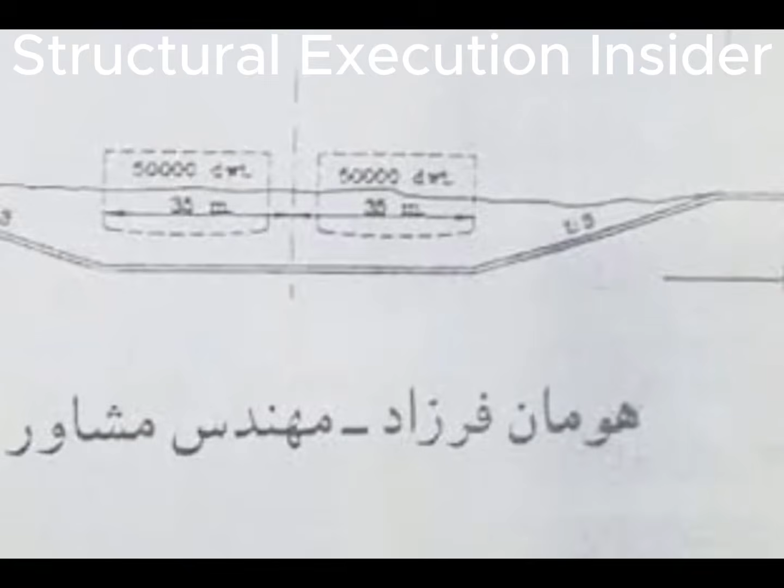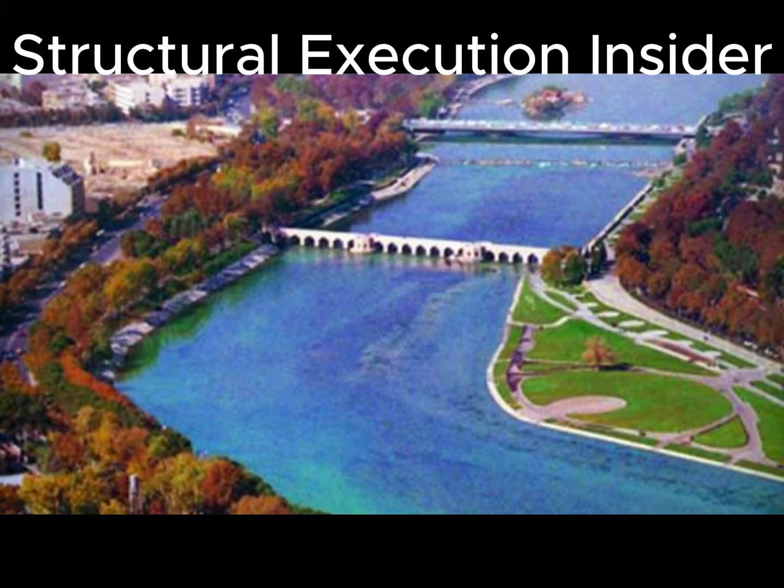For decades, Iran's water problem has been misunderstood. People talk about drought, about climate change, about consumption management, but the real problem has never been water. The real problem is the failure to understand the natural geometry of the land. Iran is a unique country, not because it has access to two seas, but because those two seas are not at the same elevation. The Persian Gulf in the south, the Caspian Sea in the north, and between them, a high, dry plateau called Central Iran.

That elevation difference is not just a number on a map. It is stored natural energy. If you understand hydraulics, you can turn that energy into water security, power generation, industrial stability, and sustainable development.

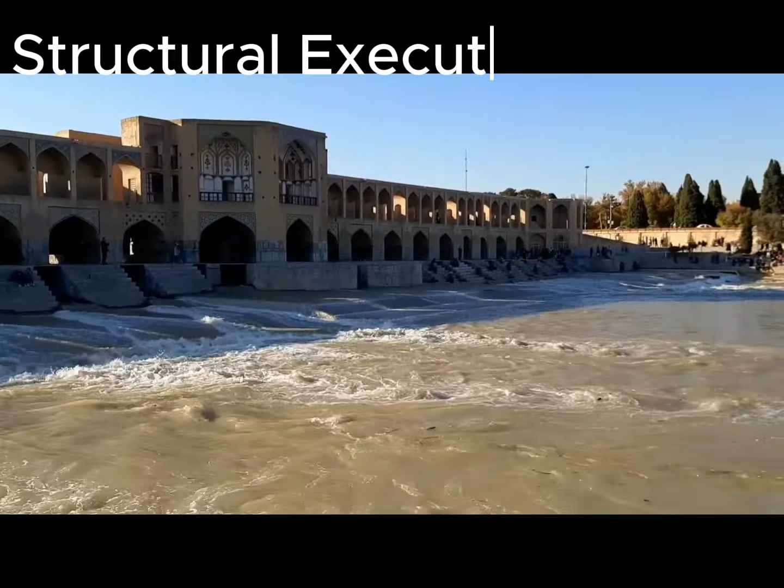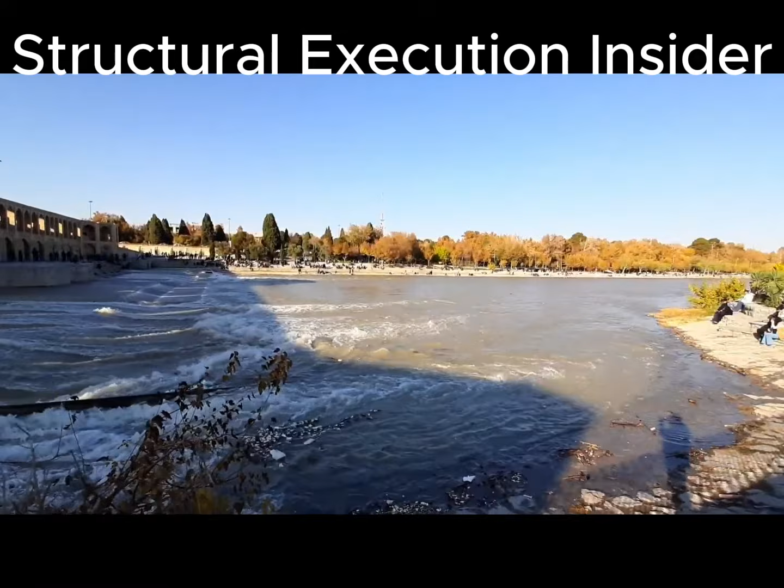The Iranrud concept was proposed over a century ago, from the Qajar era to the Pahlavi period. It was a great idea, but with one fundamental mistake. All previous Iranrud plans were based on open canals. Open canals evaporate, they consume land, they create security risks, and eventually, they fail politically. Iranrud did not fail because it was wrong. It failed because the technology did not exist.

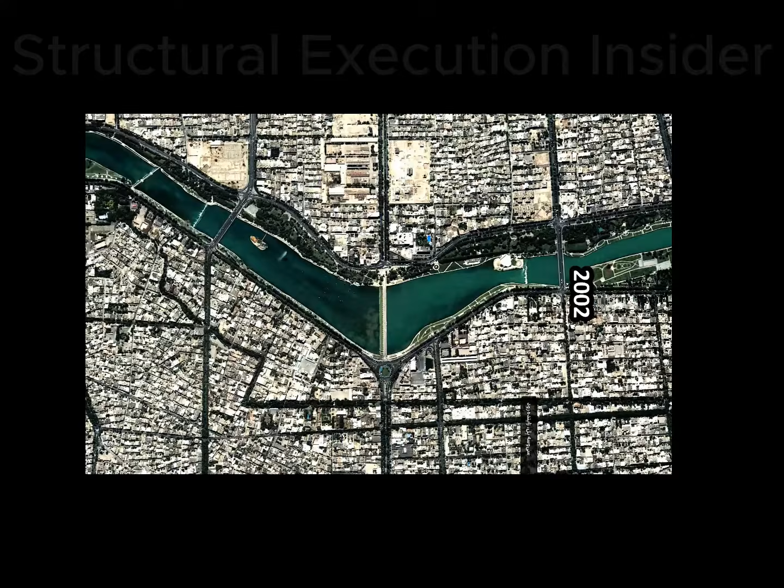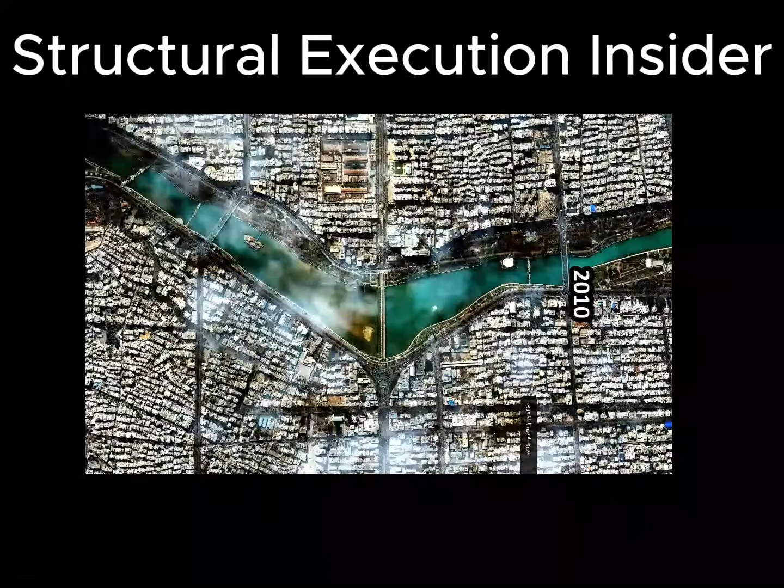Today, that has changed, not because of politics, but because of engineering. Today, we have TBMs, deep tunnels, numerical flow modeling, and global experience in underground megaprojects. Instead of canals, tunnels. Instead of evaporation, pressurized flow. Instead of pumps, gravity. In this project, water enters from the Persian Gulf into a deep elliptical tunnel, designed as a permanent structure for generations.

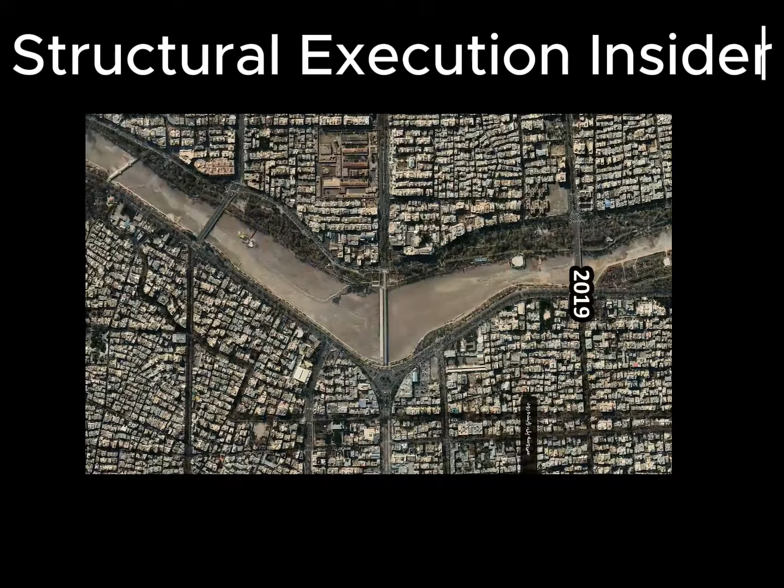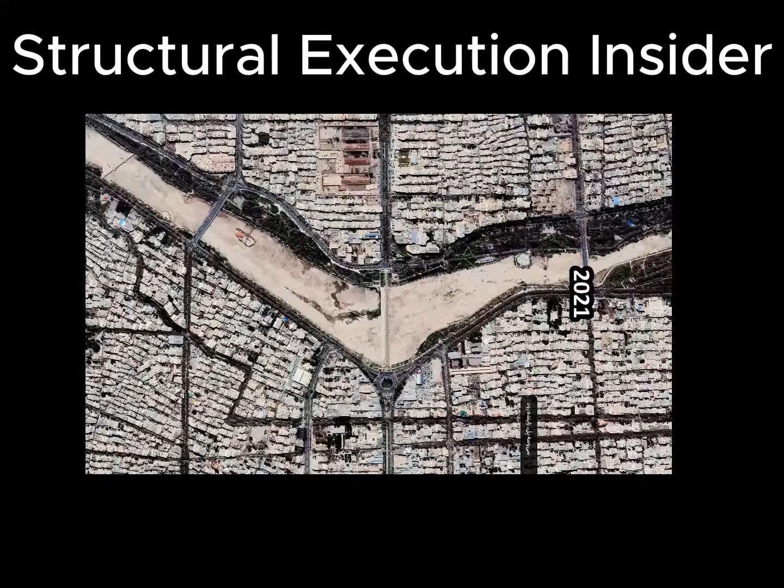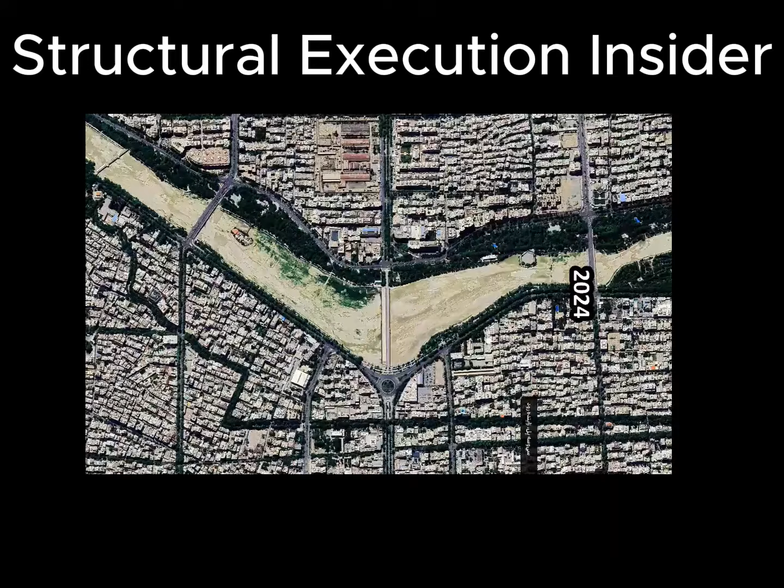No pumps, no surface pipelines, only gravity along the way. Hydropower is generated not as a showcase, but as a stable energy backbone. Near Isfahan, a portion of the water is withdrawn. It is desalinated. Cities are supplied, industry survives, and the Zayandeh-Rud is revived. The brine does not pollute the land. It is returned to the tunnel, controlled, engineered.

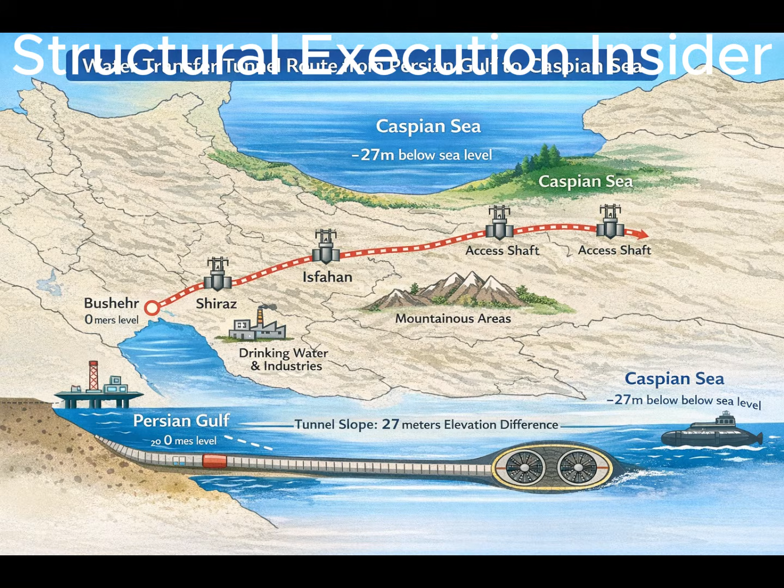Finally, the remaining water is released deep into the Caspian Sea. Without salinity shock, without ecological damage, without destabilizing the sea level. Critics often say the elevation difference is only 27 meters. Flow is impossible. That statement is true for a simple pipe; it is false

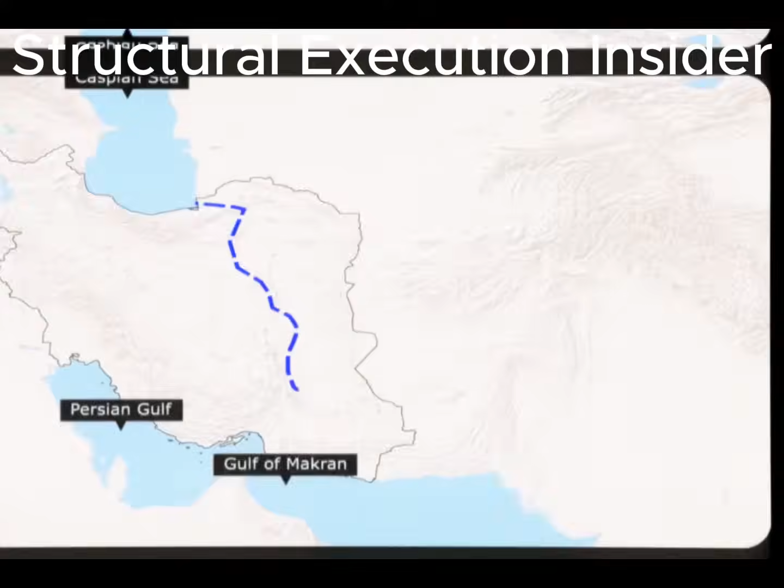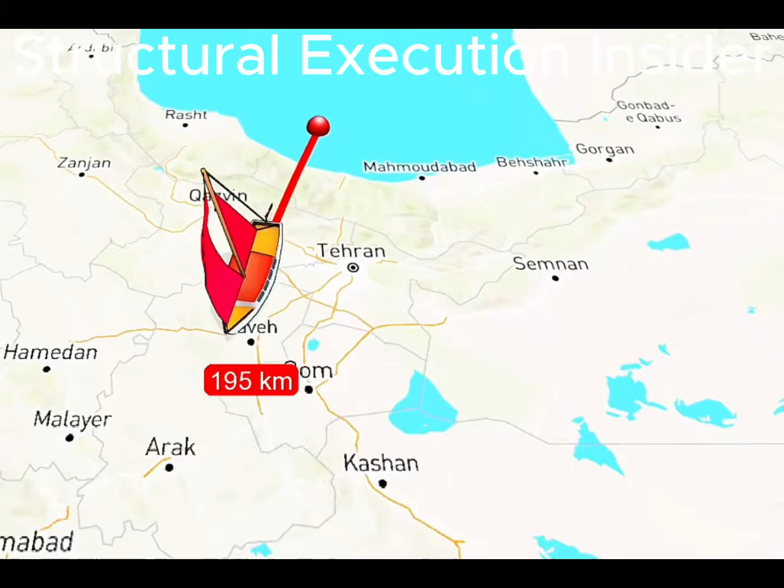for an engineered tunnel. Near the outlet, the tunnel cross-section expands, velocity drops. Kinetic energy is recovered as pressure. This is the diffuser, not an accessory, but the survival mechanism of the project. Without it, the project fails. With it, flow becomes stable. This is why the system needs no pumps, no external energy, and no classical surge tanks. The tunnel itself, with its massive water volume, acts as a natural energy buffer.

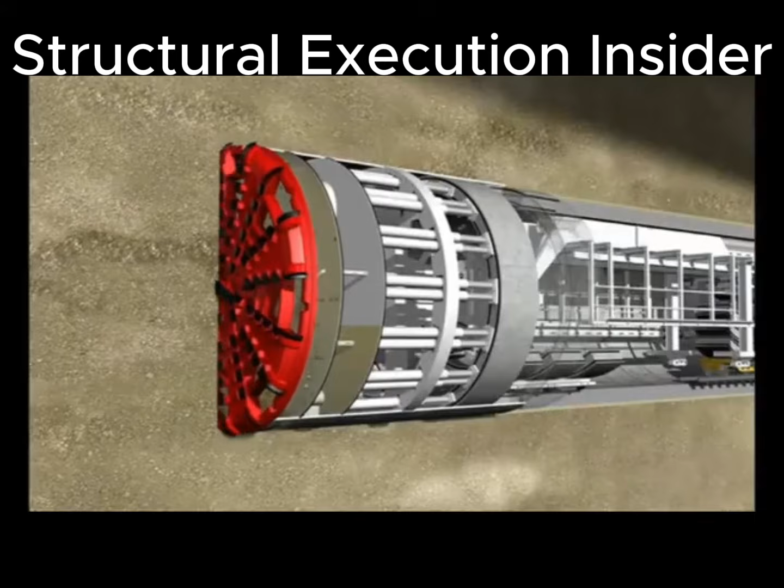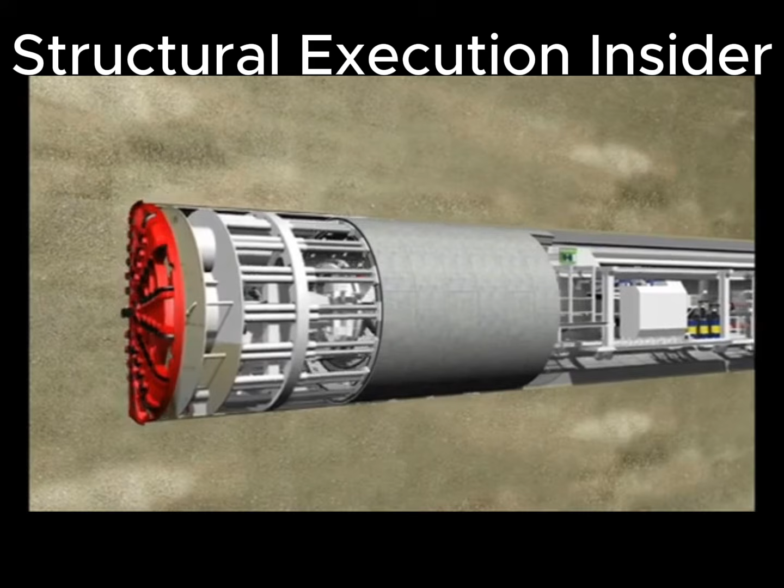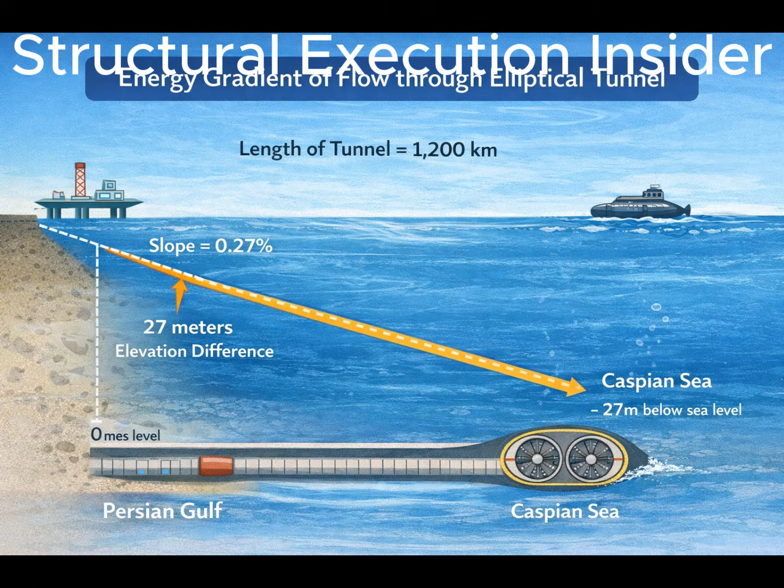Now compare this to flashy regional projects that lift seawater with pumps, pipelines, and electricity. Projects that live only as long as power exists. Saudi Arabia's mega projects, including those promoted by Mohammad bin Salman, are classic examples of spectacle engineering. High capital costs, endless operational costs, permanent energy dependency, no long-term resilience. This project is different. It works with nature, not against it.

Every country has dams, every country has canals, every country has tunnels, but not every country has two seas at different elevations. That difference is more valuable than dozens of gold mines. If you understand it, you can build a future without conflict, without dependency, and without environmental collapse. This is not a political statement, it is an engineering fact.